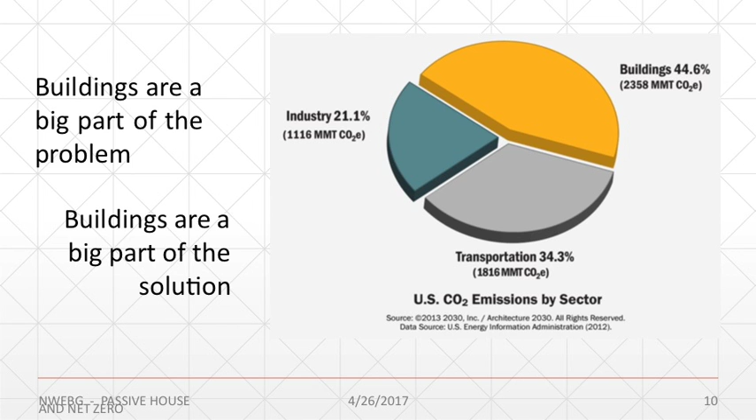And so in the collective aspect, this is what we're looking at. Buildings are a big part of this problem of all of that carbon emissions. Buildings are 40+%, almost 50% of total carbon emissions in the United States on an annual basis, currently and historically. And where is that coming from? Well, buildings are part of the problem, so we are a part of the solution, and passive house and net zero are absolutely critical for delivering that solution.

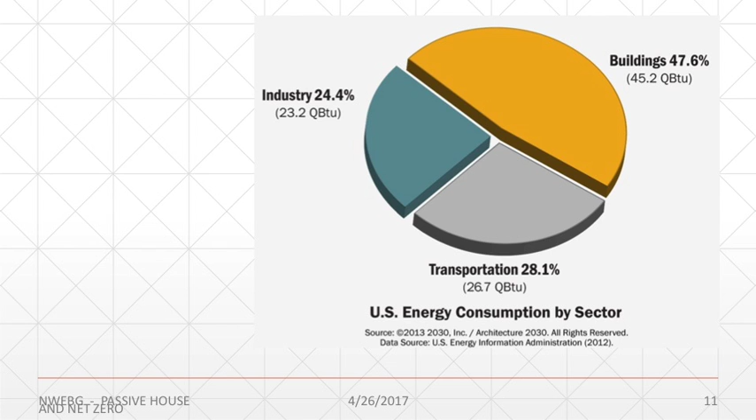And how is it? It's because it almost exactly corresponds, 48% versus 45%, carbon emissions versus energy consumption. So when we drop our energy puzzle, we're dropping down our carbon emissions as an industry. And lots of folks recognize this. This is King County's Strategic Climate Action Plan. Not just the city, not any individual city, the whole county has developed a climate action plan.

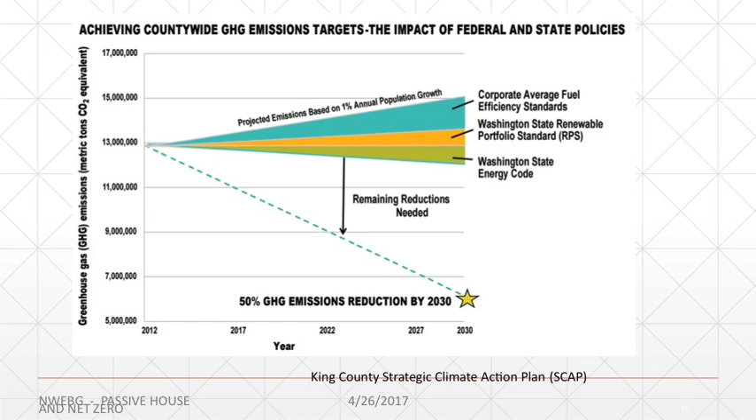And this portion up here is what's generally going to happen in society with emissions. So what do we need to do as a regional entity to drop it to the goal in 2030? How many years is that? 13 years out. We have to drop this much, 50% in 13 years. It's a very aggressive plan. It's one of the best plans I've seen in the entire United States. So kudos to the folks at King County who've put that together, and it's up to us in this room and our building industry to implement it.

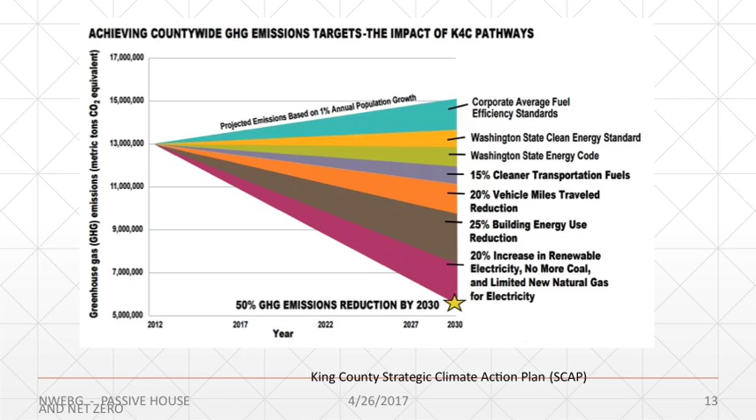And how are they going to implement it? Right there, 45% of it is from building energy reduction and increased renewable electricity, and a little bit of more natural gas than coal. But predominantly, it's going to be from building efficiencies and renewable production. That's what we're talking about tonight. So King County's got their finger on the goal. So what are we doing? We're drawing lines in the sand. We're giving ourselves some goals.

And that's a tremendous thing that both Net Zero and Passive House do: they give us a line in the sand and they say, your building needs to perform this well. It's a goal for us. And there's a number of tools we can use to get to it, and these guys are going to talk about their projects and how they've met this line in the sand.

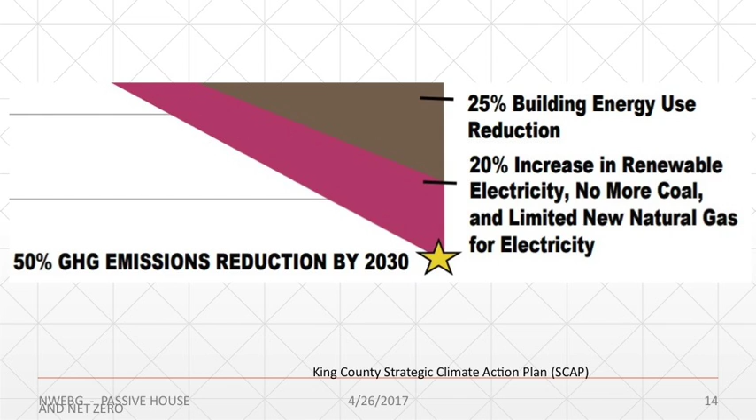I'll go into a little bit more, but there's a few other aspects for net zero goals. There are other terms you might hear out there. One is a zero energy building. Another one is net zero or zero net energy, ZNE, and net zero site energy. There's a difference between site energy use and source energy use, so there's two: net zero site, net zero source. And that's super critical. When we're talking about the collective and the commons, we're talking about source energy. When we're talking about the individual, we're talking about site.

So site energy is how fast your meter spins. Source energy is how much society needs to extract, deliver, burn, transmit to get your toaster to work. So source is a much more complex number than just the utility meter spinning, and from a collective and societal basis, it's actually even more important. So Passive House by definition looks at source energy. It's one of the critical lines in the sand, saying your source energy is as important as your site energy, whereas most net zero projects are looking exclusively at how fast the meter's spinning.

Then there's another one, which is a zero emissions building. Now that's a pretty cool one. And there's another one which I really like, zero net carbon. Who here goes to Architecture 2030 events? They have adopted zero net carbon, so we'll be seeing that more and more. Passive House is a tremendous goal. Net zero energy is a tremendous goal. As we move forward within our building community, we'll be looking more and more at zero net carbon.

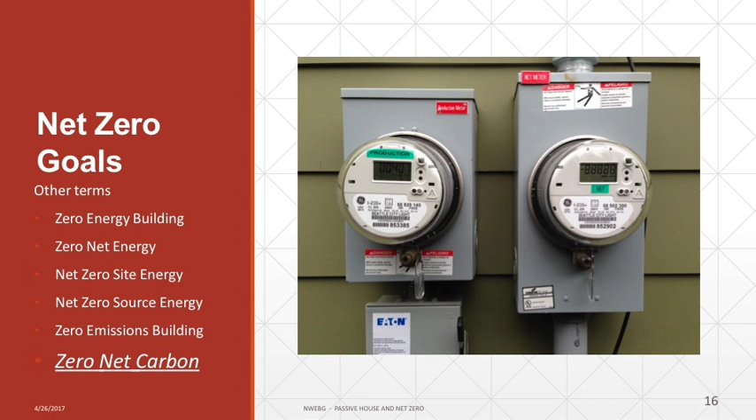So another aspect we want to make sure of is, what are you using? What's included in that number, in your site number? There's a lot of external uses, and how are we incorporating them? So transportation. Is transportation included? Wow, that is a big number, right? And I'll show you a project later that we were able to include it in. Food production, consumables, generally water.

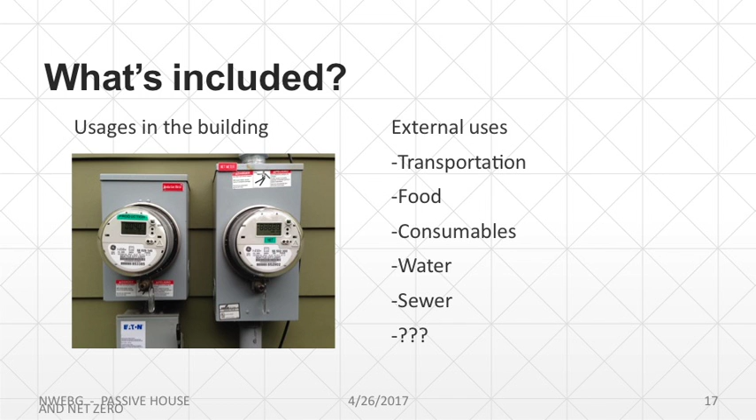Who here has a well pump? Anybody in the room have a well pump? We got one well pump in the room. If he's doing a net zero building, he's got to account for his well pump. Everybody else in here gets to use the city water and doesn't have to account for it. Right? So when we're looking at net zero, let's understand what we're including and what we're defining with it. And then sewer, same thing with sewer. So there's a lot of potential other aspects.

And it's a lot easier to get to annual net zero with an efficient building. It is possible to get to annual net zero with an inefficient building if you have enough PV production and an efficient user. But when we're talking about really doing this and getting the deliverables, we want to build our buildings so that people don't have to wear a hair shirt to get to net zero. That's what we're looking for, right?

So in general, what are the numbers? Per person, residential use only, over 4,000 kilowatt hours per year. That's what our buildings are consuming. And for Washington State, it's even more. We need the lights on more, we need a little bit more heat than average, and we've got really cheap electricity, right? Add those things up. Here in Washington State, we consume about 5% more than average across the country. But then if you add in all uses, it doubles. Transportation, and all those other parts and pieces.

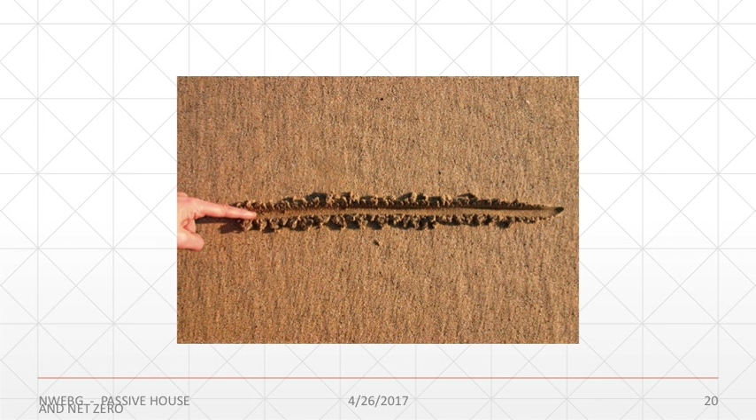So for me, it's most important to have the building be as efficient as economically feasible. That's why I've leaned more towards passive house, with the caveat that net zero is a terrific additional goal. And those are my lines in the sand. So passive house, conservation and production, these two aspects.

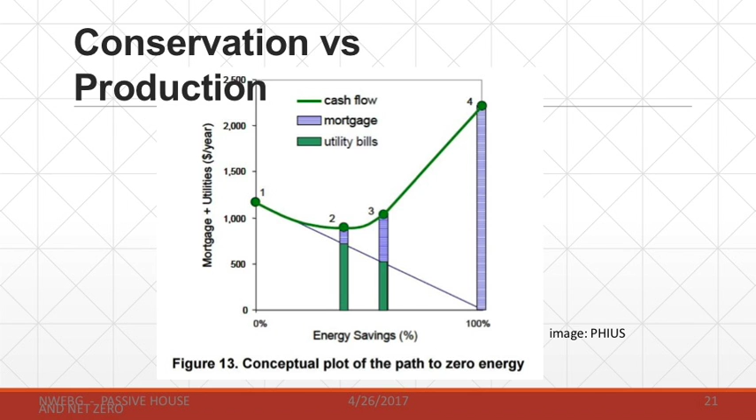And this is the curve that was developed by the Passive House Institute US in 2015, where they analyzed and said this is our average consumption level. Here is where most net zero buildings, or DOE's Build America program, says to stop. Well, if we squeeze a little bit more efficiency out for not much more investment, we can drive our energy savings even lower. And then we have that much less that we need to produce. So then to get down to a zero energy building needed a lot more investment.

This is 2015. Who here installed PV in 2015? Anybody? Do you wish you did in 2017? No? Yes, you got the production. Yeah. The cost, it's definitely higher.

So this curve is going down because PV costs are coming down and down. That's actually going to affect where point number 3 is. So within the passive house community, look for an adjustment within the passive house standard from PHIUS adapting the level of how efficient the building needs to be. So when we look at production, what are we looking at? Wow, we're way up here in the corner. We've got the worst solar exposure in the entire country.

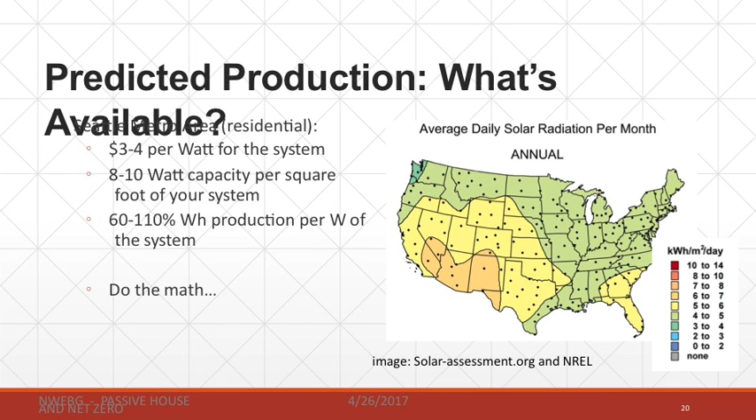If you put PV panels in Southern California, you can double your production of the same panel as you put it in Seattle, Washington. So does the electron care if it's consumed here, if it goes across the wire? A little bit because of transmission losses. But within the politics of energy and the use of energy, it's a little bit of a mixture about where, but we have a hurdle here that our PV panels do not produce as much.

So in general, we're at $3 to $4 per watt for a system, 8 to 10 watt capacity per square foot of your roof. You can do the math. How much do I need to meet that 4,000 kilowatt hours per year? Generally, a shady site will have 50 to 60% production. You can do the math. That's what we do. We go back and we crunch the numbers and we say, my system in this dark corner of the world will produce this amount, and that's how big a system I need.

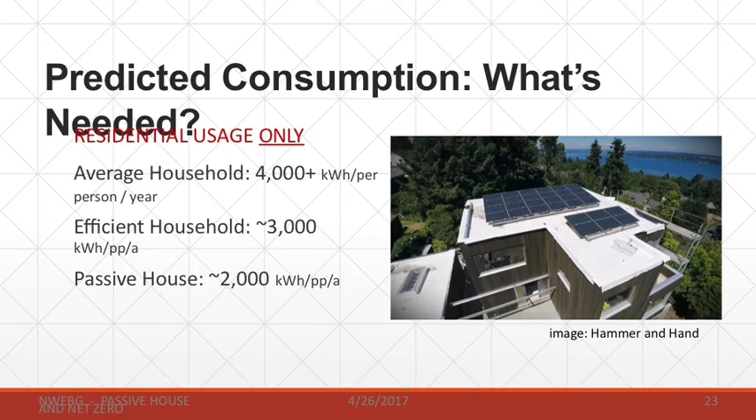And then for residential usage only, average households are about 4,000 kilowatt hours per year. It's good, you know, without a hair shirt on. Efficient households are down to about 3,000. Passive house, we're driving it down to 2,000 kilowatt hours per year, per person. That's an approximation. So for a 4-person household, your PV system needs to produce about 8,000 kilowatt hours per year. It's pretty straightforward math. You go back to this equation and figure out how big it needs to be.

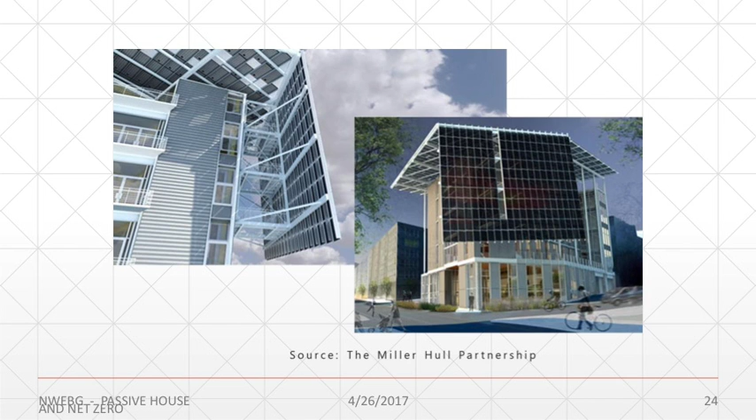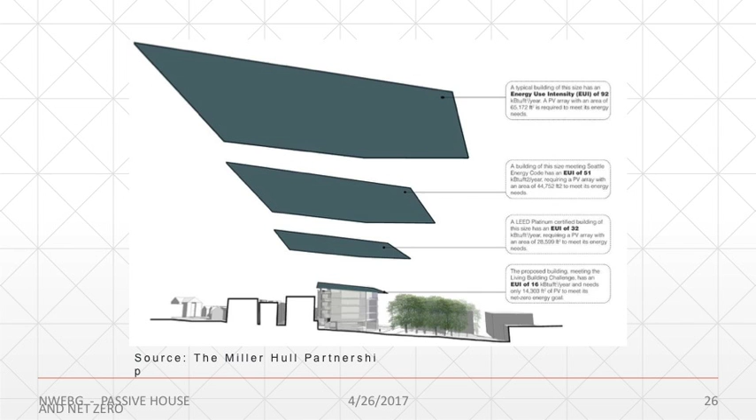And if you build a really inefficient building, not like the Bullitt Center, you end up needing a tremendous amount of PV. But instead, if you do the work, you can downsize your system and get it appropriately sized to the building, even with a high energy use intensity like a commercial space. So if you conserve, if you reduce your consumption, then you can meet it with your production more easily. That's the crux behind net zero and passive house as a great team: we reduce the consumption significantly so we can meet that goal of site net zero.

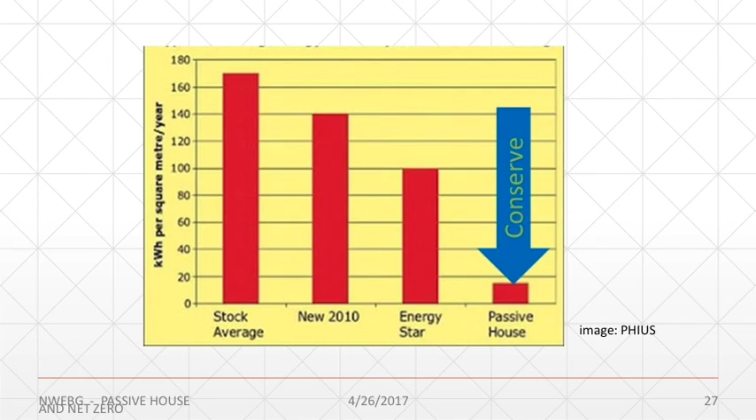So one thing I do want to comment though, how am I doing on the slides? Okay, I'm getting there. I'll get there.

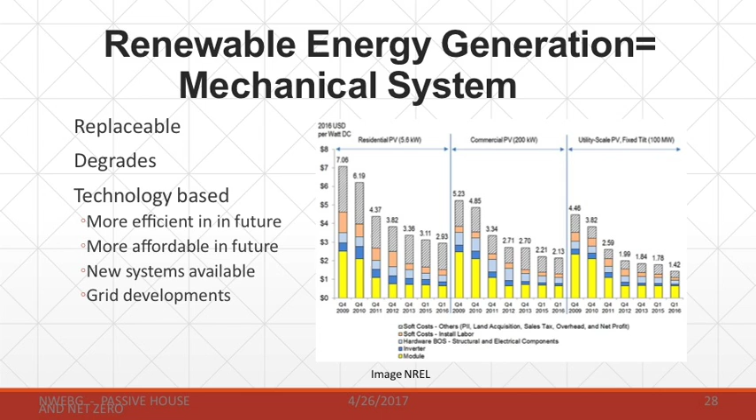We get over here into utility PV, it's less than $2 a watt around the country. When we're looking at residential, it's double that. And in Washington State, it's even more because we don't have as advanced an industry as other parts of our country. But one thing I do want to talk about is PV is replaceable. It degrades. It's a mechanical system. It's like your furnace, like your refrigerator. It is a system that's bolted onto the building.

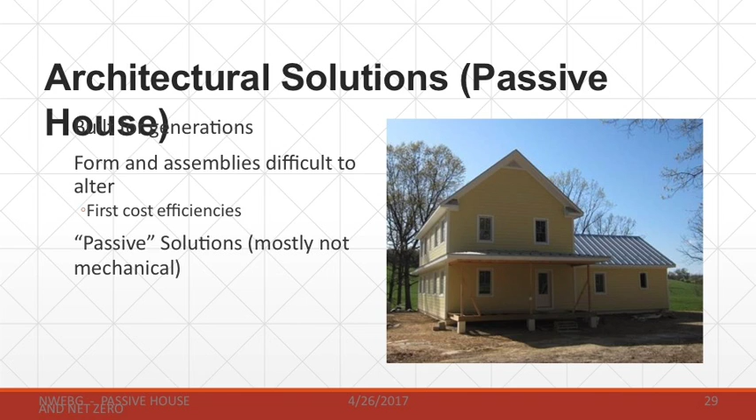So what I want to be very aware of is that architectural solutions can be more long-lived. When you build a building, when do you want to alter the form, the walls, the roof of the building? Hopefully never while you live in it. So whereas we may be altering our panels, that mechanical system we bolted onto the building, we frequently want to leave the structure built for generations, especially the form. So I emphasize passive solutions from architectural and construction methodologies to drop that energy, and then we can alter our mechanical systems through the ages as they're readily adaptable.

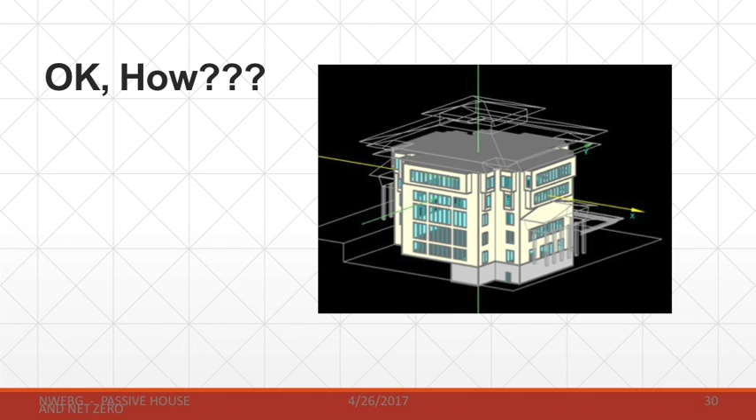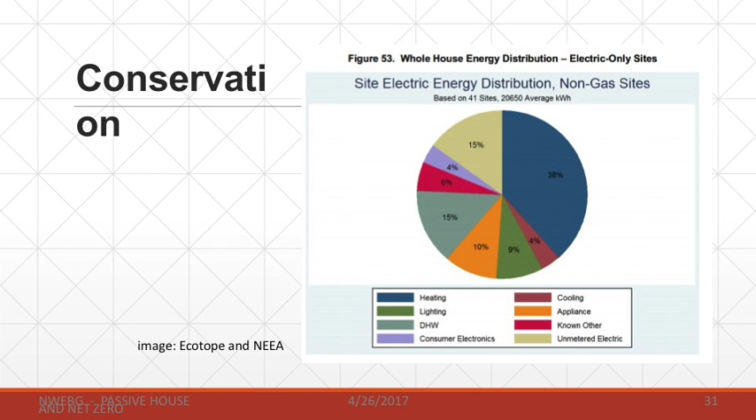So how the heck do we do this? We use a lot of cool tools. I like to do a lot of work on the front end, model the building and optimize it, and say, if we did this or that, we could lower our energy bills by this much. We look at general consumption levels; there's a lot of great work done by Ecotope and NEEA surveying the Northwest. We look at the big pieces and hit them hard, mostly the envelope and the domestic hot water system. On my recent single family projects, assembly values are floors R15 to R30, walls R35 to 40, roof 40 to 60. It's not crazy.

We've learned a lot in the past 6-7 years. We don't have to go so far because we've learned how to adapt the systems. We're still using very good windows, very good ventilation, good air tightness. When we're getting up to multifamily, I work in a multifamily building, it is code levels of insulation, straight up.

Passive house levels. It's never going to be net zero until they really figure out a whole new way to produce energy, because it's so many occupants in such a small space and there's nowhere to put a lot of renewables on the building. But it can be passive house, with code levels of insulation, better systems, better implements.

Then we also really have to work on the building systems that go into the building. Appliances, got to make sure they're top level appliances, make sure your lighting's all good, making sure your heating and cooling systems are efficient. We're looking for top level efficiency for all our mechanical systems, right? Can you skimp on one or another? Quite possibly, but that's where the optimization comes in.

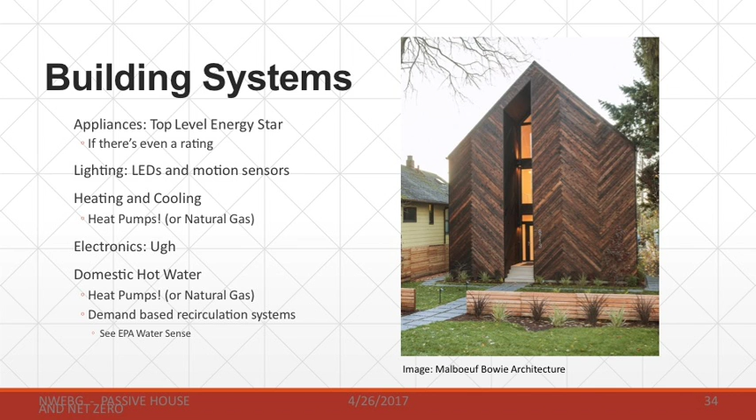And then domestic hot water is a huge thing. Look to something called EPA WaterSense. They have a tremendous program. There's another great guy named Gary Klein. He's got a lot of really good information. But tools, there's a lot of really good tools, and the tools will help you optimize your building. And there's a lot of good energy models.

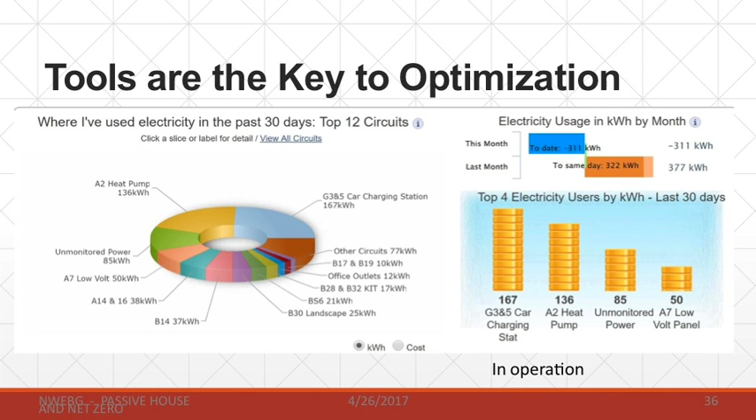But one thing I also want to emphasize is to get the building to work effectively, you need to analyze it after you build it, after you move into it, because you can have a really efficient occupant, but one of those systems might not be working effectively. And if you don't look at it, if you don't monitor it, you may have something broken.

And this building here, we had a tremendous energy user, and it was that induction stove. It was pulling a constant draw of 70 watts. It was the brain in the thing. It was using more than the entire laundry system. It was using almost as much energy as the domestic hot water system.

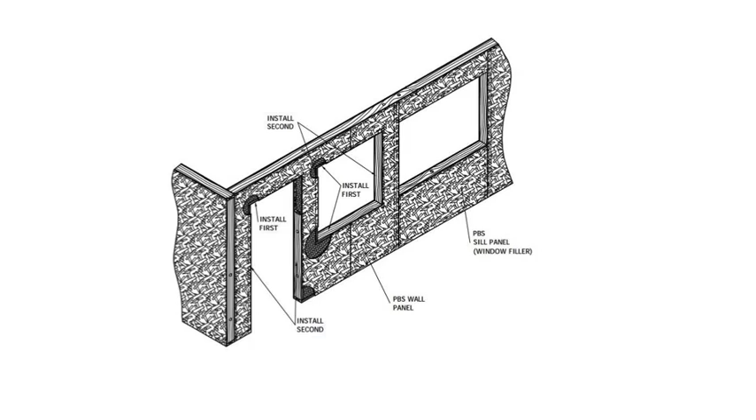One of the advantages of SIPs is that you get great air sealing. Another advantage is that you get a thinner wall. And so we're building an R29 wall with a 6-inch wall, which in the city where you're on tight properties, becomes a pretty big deal.

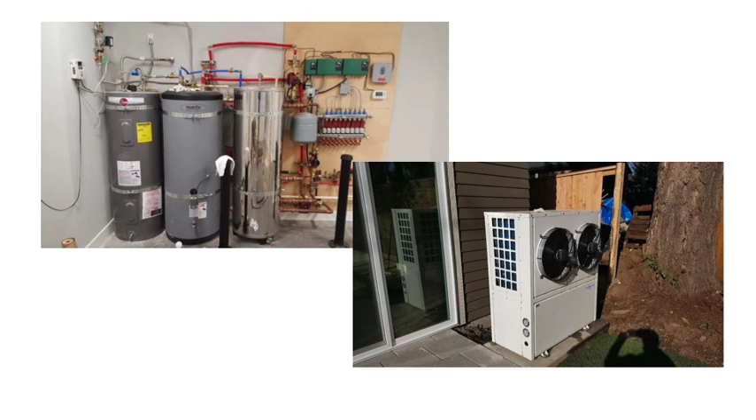another component of our process is the air-to-water heat pump. So typically we'll do all our heating and hot water with some version of chiller. This one's a Thermomatrix. We're currently using a Chiltrix, which is about as cost-effective as your regular heating system or a gas boiler or something like that, but has a coefficient of performance of about 4. So it's about 4 times as efficient as your typical heating and hot water system.

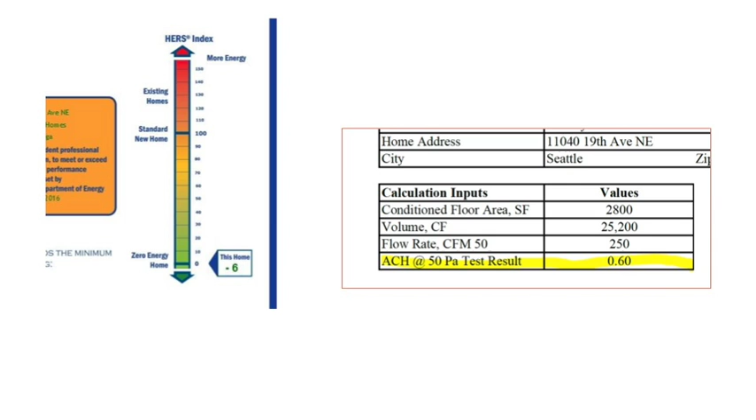So we're able to drastically reduce the amount of energy we need to heat and our hot water usage, which are the major components of the energy use of the building. So this is a HERS rating for that house, just barely below net zero, but depending on the occupant, could also power an electric car. Like with my personal house, we were at about a -13, and we powered 2 electric cars and a hot tub in the building, just because our occupant use is pretty low.

And I think with the 10 kilowatt PV system, we have 4 adults and 4 kids all using hot water. So that heat pump became essential to producing hot water to get to that kind of level. That looks like a lot of complicated stuff. We try not to do that. We do quite a bit of energy modeling, but we, again, keep it pretty simple and figure out, well, how do we get from point A to point B as cost effective and efficiently as possible?

Because efficiency isn't just in how much energy your building uses, but it's also how complicated it is to build, how long it takes to build. Our last house we built in 4 months, start to finish, and that was from breaking ground to the customer moving in, so these places sold in about 6 days after we finished them, for substantially more than the $175 a square foot, because the guy that hired us wanted to make money as well, but that was our building cost.

This is, for me at least, another component of a net zero house: a house that can power your car, because I decided a couple of years ago that I didn't want to buy gasoline anymore, and so I don't want to buy power from the grid, and I don't want to buy gas. So having an electric car that would just plug into the house, I plug it in when I get home, I drive around, and the house powers the car.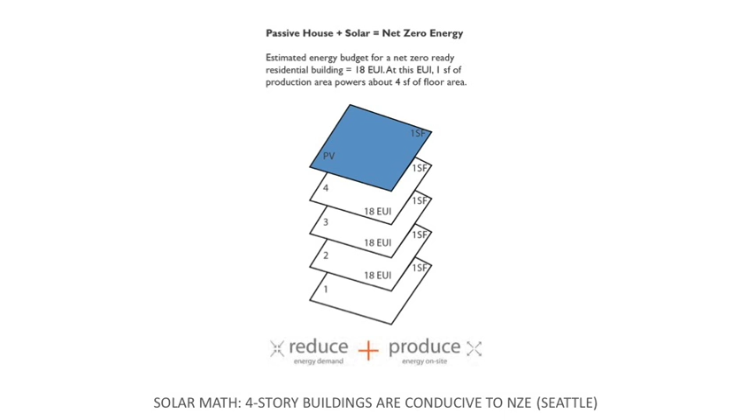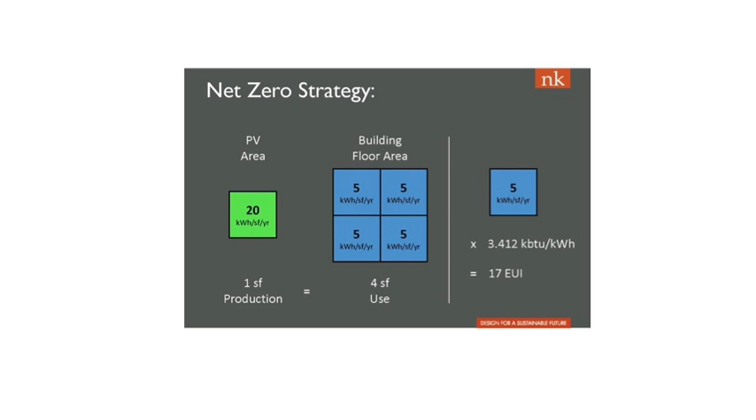We also originally were targeting being a net zero building. But in order to do that, we took the calculation of finding the absolute best solar panels you can buy, SunPower, and seeing what they could produce, to see if there's enough roof area to make that a net zero building. And the concept was if you had an EUI of 18 on each of your 4 floors, and you covered the entire roof with the best panels, you could get a net zero building. So 20 is about the maximum you can get today from a SunPower panel on a square foot basis, 20 kilowatt hours. And the 17 EUI of the building operation itself would be 1/4 of that. So that would give you a net zero building under ideal circumstances.

So you might get 3 stories of net zero and 1 story that's not, just to give you an idea of what's feasible today in an urban environment for going toward net zero. In this particular case, we had a ground floor that involved some retail, 10 units per floor above, an open court and open walkway on the east side.

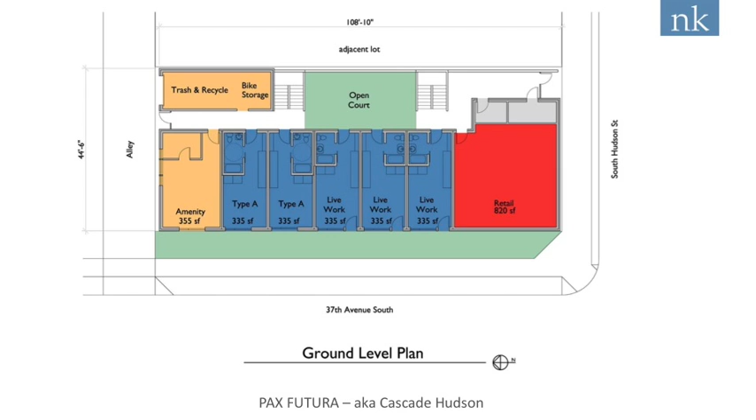And one of the new concepts we're trying to pursue here is how to make the ventilation system as efficient as possible. And efficiency not just in terms of how it performs, but how you get the most value out of each piece of the system. So we decided to go with a distributed ventilation system where, in this case, originally there were 2 HRVs per floor, each one serving 5 units. And it would be a house-sized ventilator serving 5 units. Now you have 1/5 of the cost of the unit being shared by 5 units.

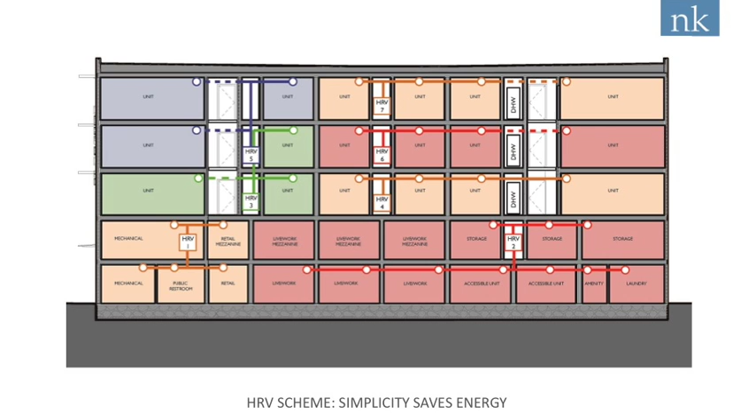This was the ultimate layout that we ended up using, which is 6 units per floor, as you see them up there, on those floors, and then split 2 and 4 on the other end of the building. So we still had a distributed system that, all things working out, will start construction in the next month or so. So we think that's a great way to go because it brings the cost down of making a high-performance ventilation system in the range of about $1,000 per unit, which is substantially better than your typical house-sized per unit basis.

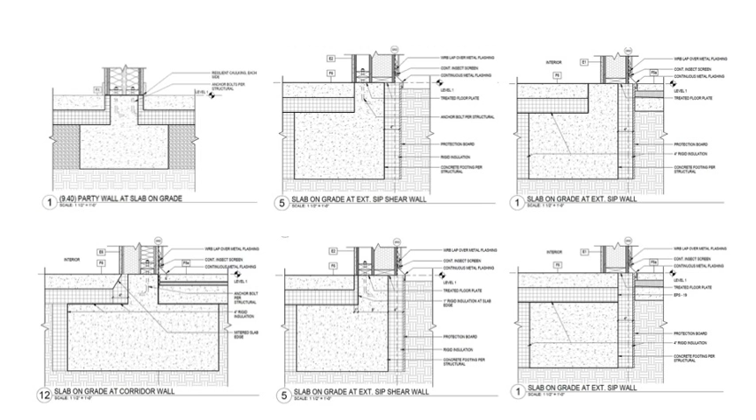So on this particular building, what we tried to do was allow the SIPs panels to be simply a cladding on the exterior of the structure, so that we're moving the structure slightly to the interior and letting the panel be on the outside. So by the fact that this wall was not structural, we were able to extend the insulation through and let that insulation wrap through the corner and make it a much more efficient condition. That's one of the things we're looking at, how to make these things work more efficiently in a simple, less expensive solution. And this is an example of the THERM modeling of a couple of different conditions that really help achieve that goal.